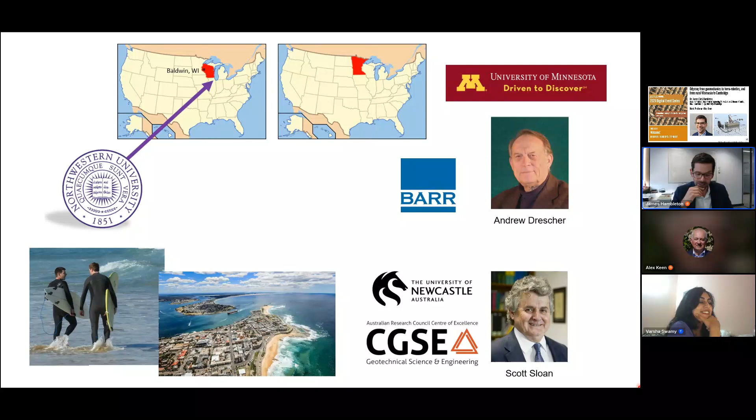As Alex mentioned, the US came calling, figuratively and literally, to come back, and that was a difficult decision, but we are Midwesterners, so Northwestern University seemed like a very natural place to go back to. That's in Northern Illinois, just north of Chicago. And I thought that that was the end of my international travels, but I'm speaking to you now from the University of Cambridge, which is a story of its own that I don't really have time to go into, and I would love to share with anybody who's interested.

Before I get into terramechanics and terra-robotics, I want to give this disclaimer that this isn't the only thing I work on. That's one of the messages I want to give young researchers: follow your passions, look all around, but do have something you focus on. I am very focused on terramechanics, as shown here.

Part of that theoretically is an interesting subset of problems, evolutionary plasticity problems, which you'll see today, so I won't spend too much time on that. I also got interested in constitutive modeling of soils. When I went to Australia, there was an interesting yield surface and plasticity theory question about whether it was convex or non-convex. It turns out that's an applied mathematics problem, which we had a lot of fun with, helping when they were stuck when I arrived.

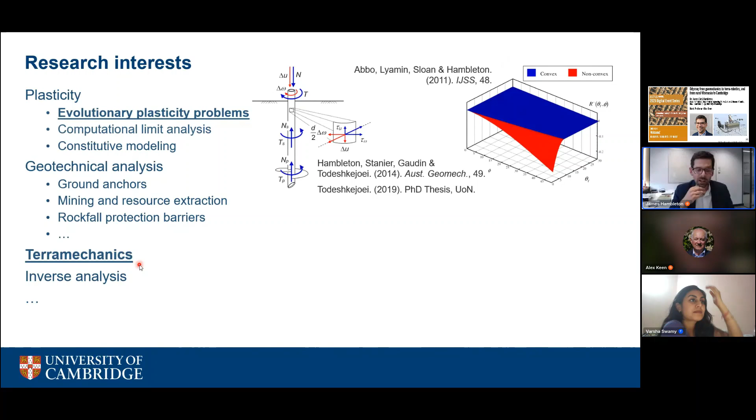I've done work on screw anchors, a very interesting geotechnical problem, actually very close to terramechanics because it involves twisting the ground anchor into the soil. It involves moving parts interacting with soil, which is the definition I'm suggesting for a terramechanics problem. This is a little more exotic - in Australia I met researchers working on this, and what I just skipped over was a real screw anchor being installed. So it's not just theory, but also the practice and applications.

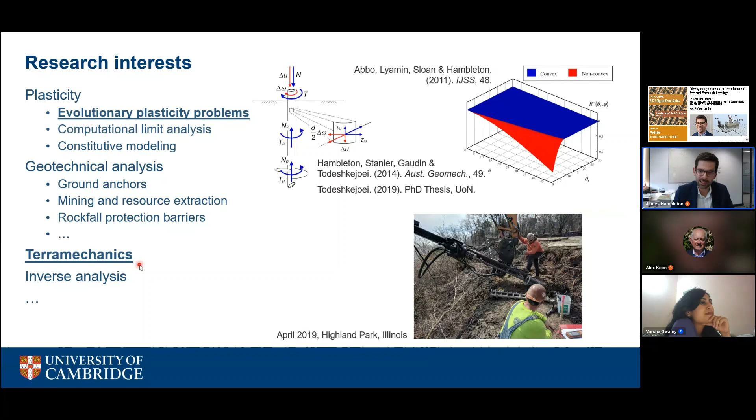I met researchers working on rockfall protection. It's a large deformation plasticity problem - you have failure of this rockfall barrier, and we got immersed in doing this sort of thing.

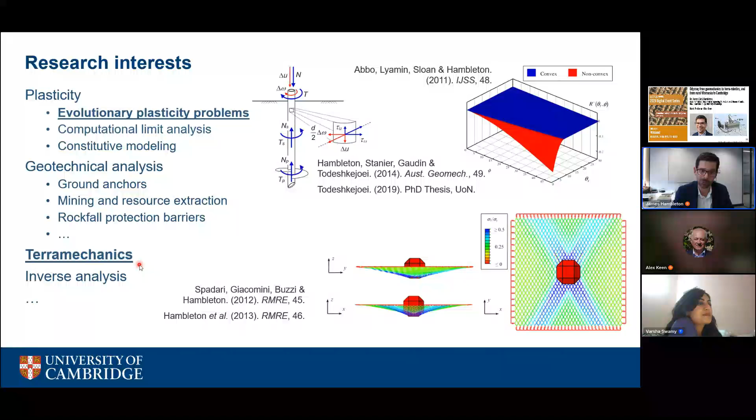So I don't want to suggest with this talk that terramechanics is my only interest, though it's very much front and center as my primary interest. As I said, I want to navigate through how I got here, and I want to appeal to talent wherever we can find it, because there are very interesting problems.

I am unusual nowadays among young people in that I'm naturally drawn to civil engineering. I imagine doing structural engineering at some point in my life, and the appeal is right there for all of us - the pyramids are on this chart moving up to the Burj Khalifa, a fascinating engineering problem. I would also say it's not just the structure, but the earth beneath - the geotechnical problem, which you don't see.

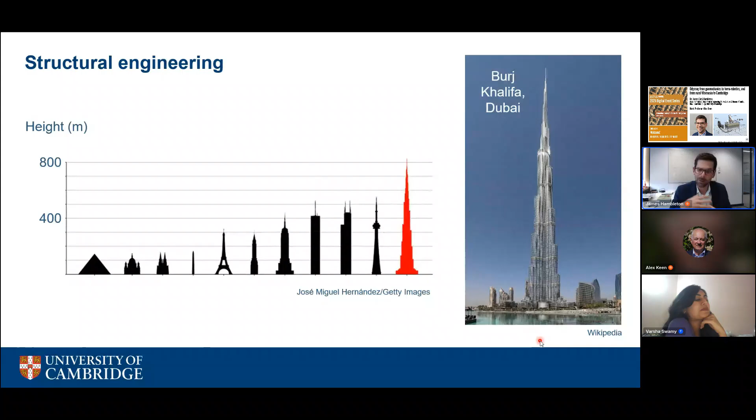And indeed, that was part of meeting Andrew Drescher and getting interested in solids and soils - these things other than slender structural members that really drew me into soil mechanics and geomechanics.

Structural engineering has its obvious applications, and plasticity and failure are right in front of you - if the structure fails, there's no question that it fails. The two examples here are the I-35W Mississippi River Bridge collapse, which we talk about here at Cambridge to our first-year engineering students, and the well-known Hyatt Regency Kansas City collapse. It's a relatively simple engineering issue, and it's almost more of an ethics issue about there not being enough involvement from the engineer in signing off and making sure everything was going to work.

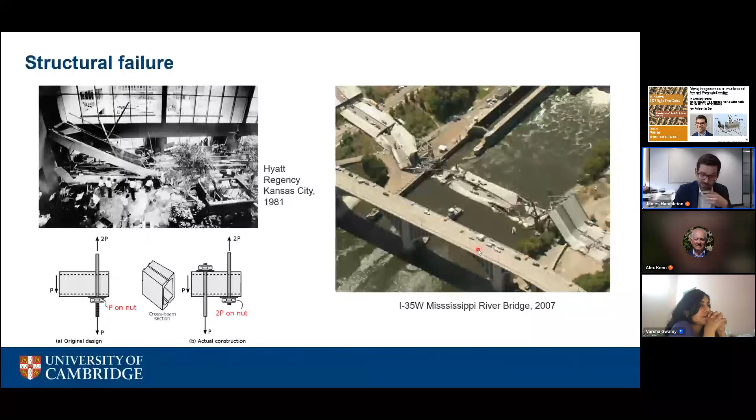So that was more or less what got me thinking about plasticity, initially for structures, and nowadays I've come to appreciate all the plasticity problems around us, including in soil mechanics. The easiest way to see that is to walk across the beach - every time you leave a footprint, that is plasticity. You've left a permanent imprint, a permanent deformation.

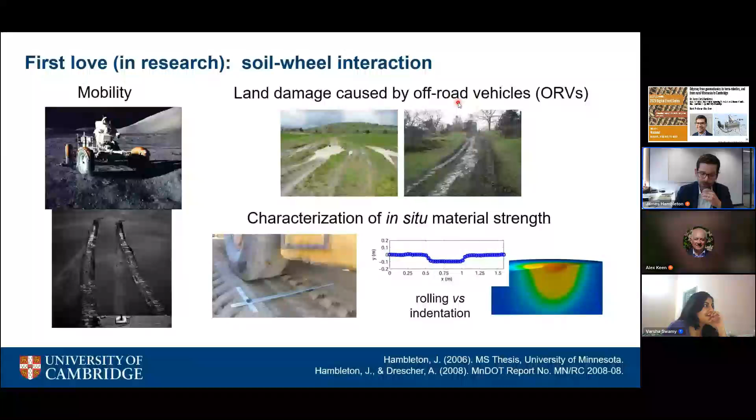That was how I got engrossed in soil-wheel interaction, which as I was going through my master's work, I realized is, of course, not just this problem for the Department of Transportation, but it's mobility. We're here with the International Society for Terrain Vehicle Systems, so these sorts of problems are no surprise. And then other interesting things like land damage. I started to see soil-wheel interaction all over the place.

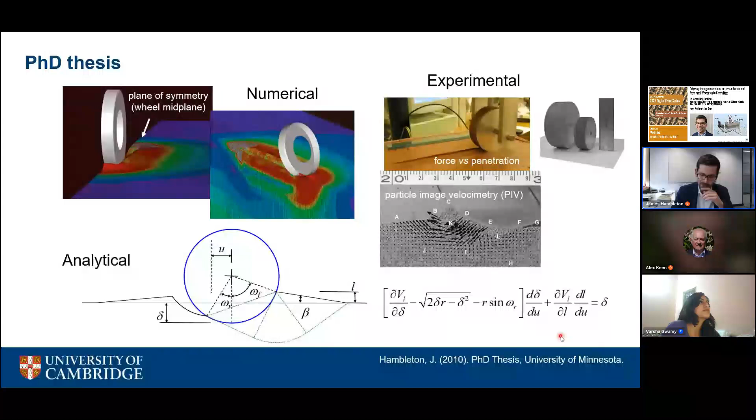After my master's project and wrapping up this project with the Department of Transportation, I completed my PhD thinking about this on multiple levels: doing numerical simulations, which are large deformation finite element simulations in 3D, doing experiments, and then doing what I think is my favorite piece of all, the analytical work—can you build mathematically a solution that gives a very quick answer to some of these problems, a theme you're going to see recurring throughout this.

Just to give you a flavor of what that is, this is far and away the most mathematical set of slides that I have in here, and I don't intend to walk through the mathematics—we don't really need it. You'll see that you can understand the problem without any of the equations or variables I'm showing. Here, let's just take indentation.

So we're talking broadly about any kind of problem where you have an object interacting with soil. It could be a wheel, which is a nice segue from what we just showed, or it could be a cylinder. Here in gray is a wheel-like, cylinder-like object. It's been pushed into some penetration depth, and as it's pushed in, it's displacing some amount of soil next to it.

That is what I mean by evolutionary—there is a process here, it's not a single state, it's a sequence of states, it's an evolutionary problem. As you push it in deeper, we go to the blue curve, and the force is going to get probably larger, although we saw earlier that it may not if it's a softening response of the material. And the lip of material off to the right here has grown.

I'm highlighting two variables in red worth noting for this. Kappa is what we're calling the distance by some measure that the lip of material to the right has moved in one small increment of deformation. And lambda is a parameter that characterizes the distance over which it's being displaced. You can zoom in on this area and do some kinematics, essentially just the geometry relating these variables to each other, thinking about differential movements here.

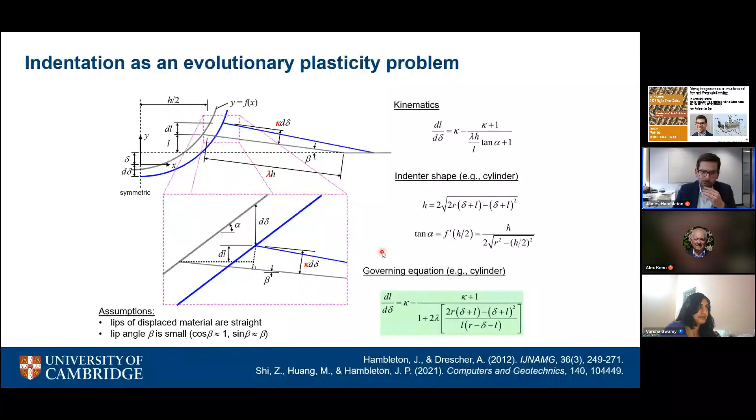As I say, I'm going very quickly through this. You ultimately wind up with a differential equation that tells you how this surface is moving as a function of how you're penetrating in. The really interesting thing about this whole approach is how do you ascertain lambda and kappa, these parameters?

Going back to the problem I showed of the foot on the beach in plasticity theory, it turns out you can actually evaluate that lambda and kappa from the theory we already have for foundations, essentially this bearing capacity problem.

We know how to evaluate, if it's not a wheel but a strip footing sitting on a surface, the average stress Q over the area of the footing, and we can even include lambda and kappa if it's an inclined surface like this in the solution. So the neat trick is you just plug in the lambda, the kappa, the Q that you get from standard plasticity theory when you go deep into the subject.

There's a little bit of mathematical work to do that sometimes yields closed form solutions for certain geometries, and you can get analytical solutions to these problems. You'll see some of these later on. Meaning I have a simple equation that relates what is the force for a given penetration. I can solve that very quickly.

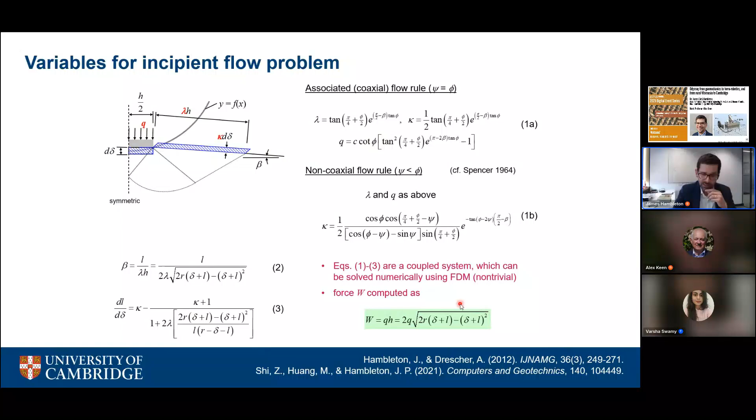Okay, so enough about that, and fewer equations from this point on. The point was not to bombard you with equations, but to show that there's some rich mathematical analysis behind this, and evolutionary plasticity problems are very interesting.

So in comes the autobiographical part, and what Alex had mentioned, what I intend to talk about is at this stage in my life, I'd done my PhD. I was casting about, showing you some of those problems I got interested in, having lots of fun. But I realized if I'm going to keep going as an academic, I need to fuel this interest somehow. There's an expectation, not too long into becoming an academic, that you should probably get some projects set up, apply for a grant, start to pay for some PhD students, master's students to come, pay for some experimental equipment, and so on.

I was thinking about, well, who am I at this point? And I was thinking this evolutionary plasticity problem is very, very interesting. What I'm showing here, just out of interest, is my bedroom in Australia, our bedroom. My wife was very tolerant of dragging in Stockton Beach sand and setting up this bin. If my father happens to be watching, this is the copy of the intellectual devotional that he gave me, which I have read, but turned out to be, if I may, far more useful as a piece of experimental apparatus.

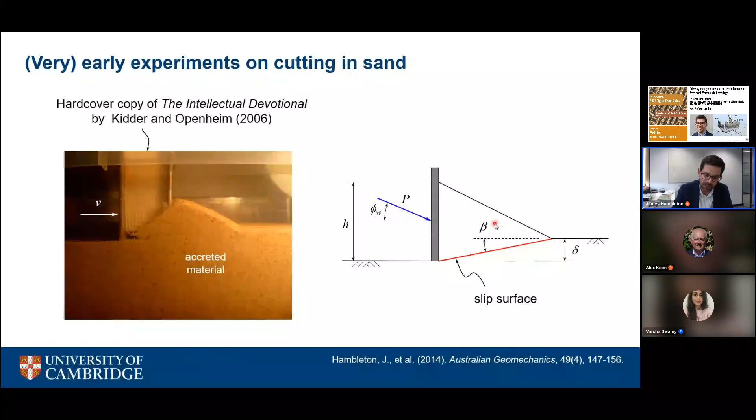There's another way you can do this, which is to just tackle it analytically. I won't go into the details, but here's a little cartoon and a model where you can say I'll build a model predicting the force, assuming that all of the deformation is concentrated along one well-defined slip surface or shear band, shown in red here. What I want to do is show you what happens if you extend that idea. I won't go through the mathematical details, I just want to show you the end result, which is most interesting to look at. There are some assumptions we need to make along the way to getting there.

The key question is whether a material has changing material properties or constant ones. The first result I'll show is without softening. Thinking about sand, it has to be moderately dense, close to the critical state, so that upon shearing it doesn't densify or loosen too much. If that were achievable, you'd expect the same strength throughout the soil as you're shearing it more and more. But of course, those who know a lot about this know the properties immediately begin changing once you start to shear.

But suppose it doesn't soften, weaken, or harden. It doesn't densify, it doesn't loosen as you're shearing it - just constant strength, constant density. What you'll see here is the deformed shape.

Now let's see what happens if we take this to a dense sand. If it's a dense sand, as you start to shear the material, it has to start to weaken - it loses its density, it loosens, and it gets weaker. That's a softening response. So what happens when we have a softening response?

Another interesting feature is that now the local inclination of the slope does get to the angle of repose. With softening introduced, we see this avalanche happening as the process unfolds, which, looking back at the heuristics from the experiments, is very consistent with what you observe for a dense sand. So, interesting problems - this one arguably much more interesting, with a periodic progression of the shear bands.

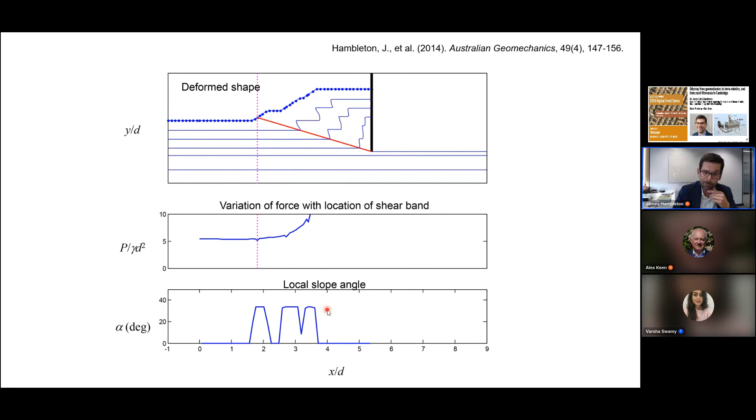They change in locations, they jump around.

So it's not an increasing function. It's a jumpy, periodic sort of behavior that we're seeing here.

So there's some results that are well before the project we've been talking about with Alex, but set me on this pathway to thinking about evolutionary problems in general, not just soils and wheels, but cutting problems. And my mind was starting to open to all of the instances where this happens.

So in come some things that are more familiar to this audience. I'm imagining the ISTVS crowd here, in fact, is Godwin and O'Dogherty, Journal of Terramechanics, which is the journal for the International Society for Terrain Vehicle Systems. There's other problems in geology and at smaller scale.

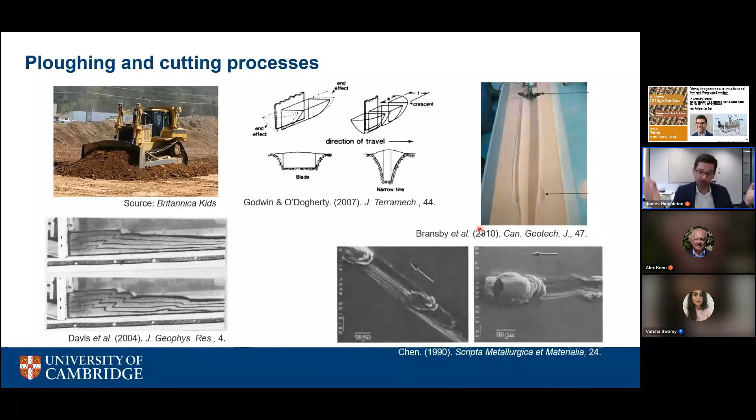And in comes one of the key pieces of advice I have in this. I was thinking I'm interested in these problems, but at this stage in my life, maybe I'm a crackpot researcher. I don't know who I am exactly, but I'm doing these experiments in my bedroom. And then we did the proper experiments. And am I crazy? Is the world going to care about these problems? Is this interesting?

I thought, which is a natural progression for a lot of people, that I need to start chasing some numbers that would motivate that this really is a grand problem. It took me a long time to hit on the right keywords to motivate it from one angle, which was thinking about how much Earth humans move. I thought it must be a lot. You put together all of the different Earth moving processes, and it's got to be a lot of Earth that we move.

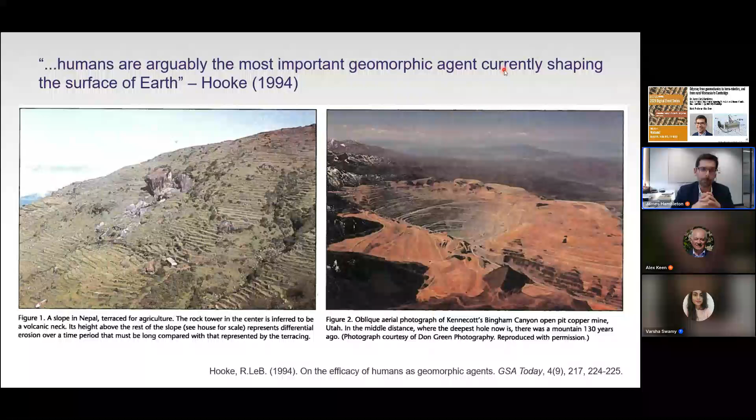And sure enough, if you're patient enough and work very hard, which I did have to do to find this, I found this paper by a geomorphologist who writes very convincingly that we are the most important geomorphic agent. He was interested in natural processes, erosion, transport of materials, and also in how much humans are doing compared to natural geomorphic processes. And the answer is we're doing a lot.

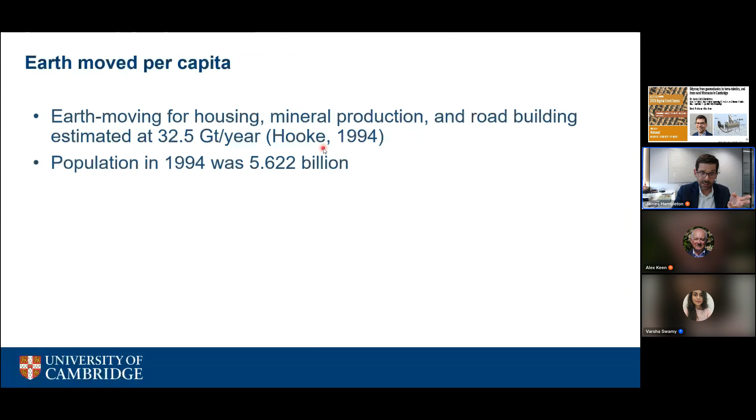It's enormous. I took the information I could find in his paper. He estimated for housing, mineral production, and road building alone, very convincingly, that it's 32.5 gigatons per year. I went and looked for the population in 1994 when this was written and divided through to come up that each of us in 1994, apparently for housing, mineral production, and road building, moved 3 cubic meters of Earth each without lifting a finger, just by virtue of living in your house, buying the products that you buy, using roads, etc.

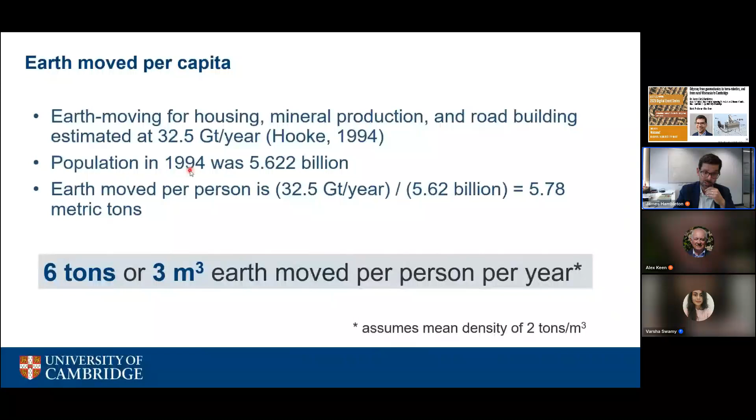And I show this number, which is published information, and I always get a variety of reactions. Some reactions are that this number is probably way too small, and certainly 1994 was a long time ago—we've probably only grown in the amount that we've moved. Very important problem then, at least I convinced myself of that. At the risk of becoming delusional, I suppose, but I thought this is a big problem, very interesting. We have some compelling arguments to make for doing it. I was thinking about offshore problems and plowing and cutting for pipelines, mobility problems across scales.

In Australia, I first started to write proposals and was successful with the DECRA, the equivalent of a National Science Foundation Career Award in Australia, working with Caterpillar at that point as an industry collaborator, thinking about how to model these problems and build efficiencies in designing earth-moving equipment, or the ant-like problem of many machines working together collaboratively to do earth moving across scales.

What happened at this stage, and that's its own story I don't have time to go into, is I was drawn back to the US. My wife was instrumental in that decision again, although this time she was far less convinced, but we had long conversations about what would be the right move for us and our family. I had children at that point. At any rate, the decision was made, for better or worse, to come back to the US, to Northwestern.

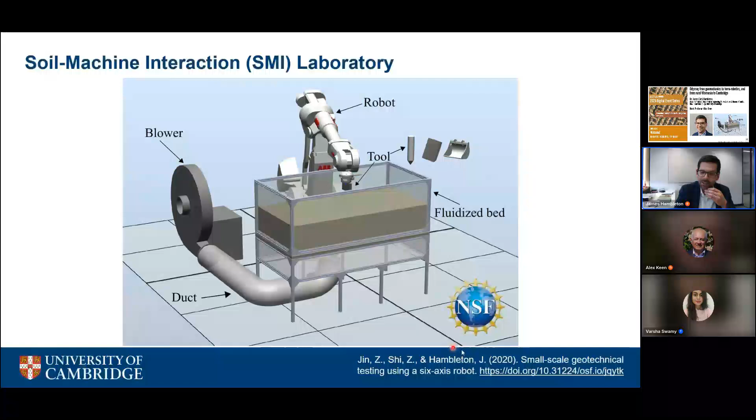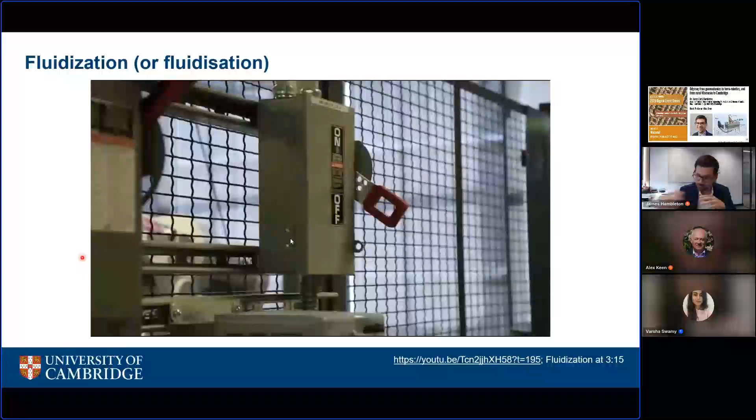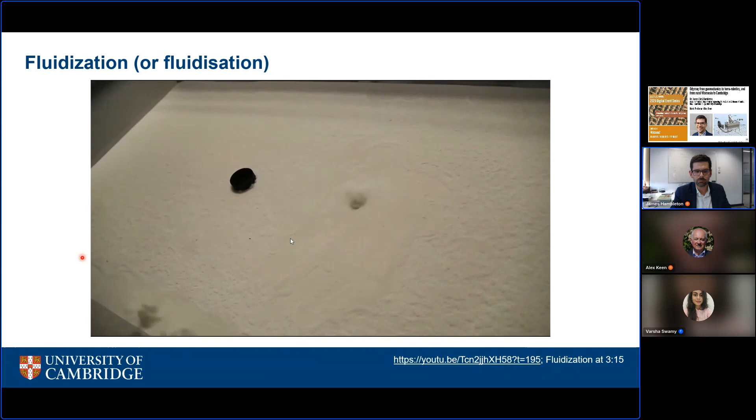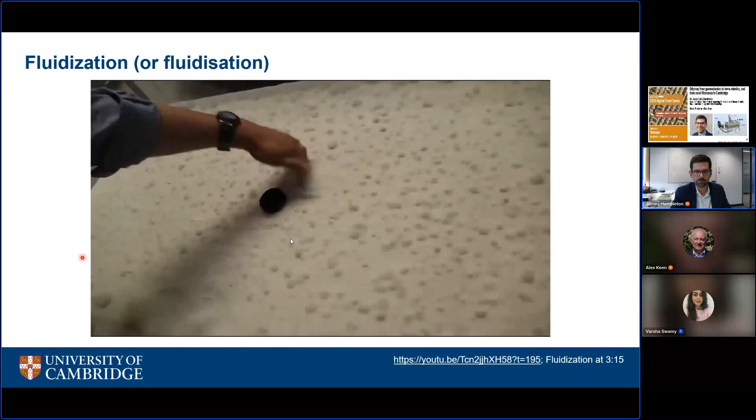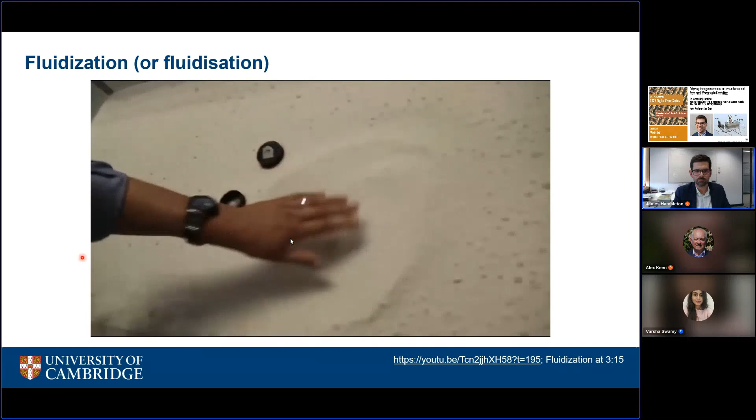Oh my God. And Tierney, you heard Tierney's voice. She worked in the front office at Civil Engineering and is very gifted with videos and music, as you can see. So what makes that video is the music.

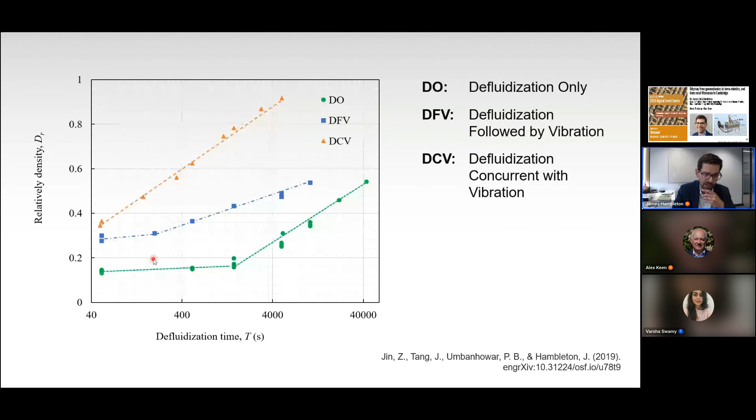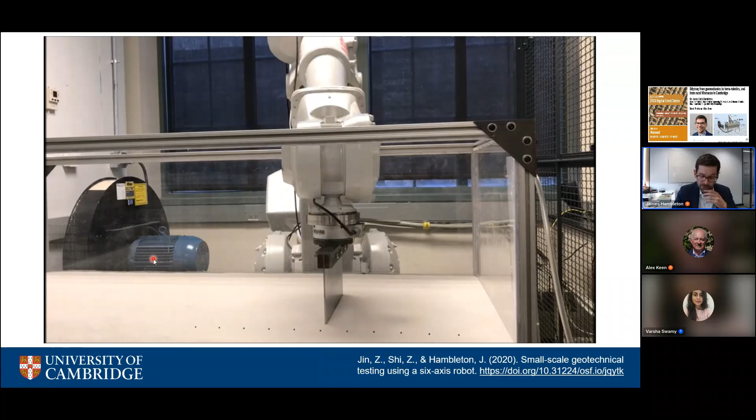So that's the test bed itself, and then the 6-axis robot is essentially, in this case, the way we started in all of this, a very flexible actuator which can do all kinds of motions, not just cutting, which is what you're seeing now, but it could do whatever you want. It's about to twist, and you could imagine even screwing something in, more complex problems, and a wide range of possible kinematics and trajectories you would follow.

So this was the moment. We built the bed, we'd got some interesting results on this, we were moving along, and it felt like the right time to really declare, and that's what you do for one of these career projects. It's an unusual grant proposal in a way, because you're kind of making it about yourself.

Lots of grant proposals, you have a compelling problem, you argue for it to be done, but you have a team of people and resources are going to be distributed. The spirit of the Career Award, and this DECRA in Australia, is that it's something to help early career researchers, and you really want to think about who you are and what you want to do, or what sorts of problems you want to work on. It's meant to launch you into your research career.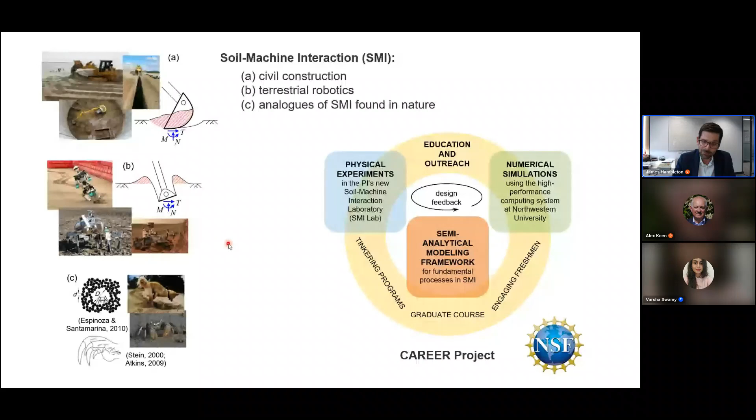Some of that came to fruition, but a lot of it was actually derailed by the COVID pandemic. So I don't have much more time-wise that I can say about education and outreach, and I don't need to, because you're welcome to go, if you're interested in this, to Figshare, or this is also on YouTube. I recorded a talk on inspiring interest in geotechnics, or terramechanics, and that's the point of today. I was imagining advocating for geotechnics. Today I'm advocating for terramechanics.

This is the same problem we have in terramechanics, in that there isn't a clear entryway into terramechanics from the very beginning, unless you happen to have done a lot in your own backyard in a community. Alex and I actually had a lot of conversation about this just yesterday, that both of us come from rural areas and would have been very familiar with terramechanics problems at an early age.

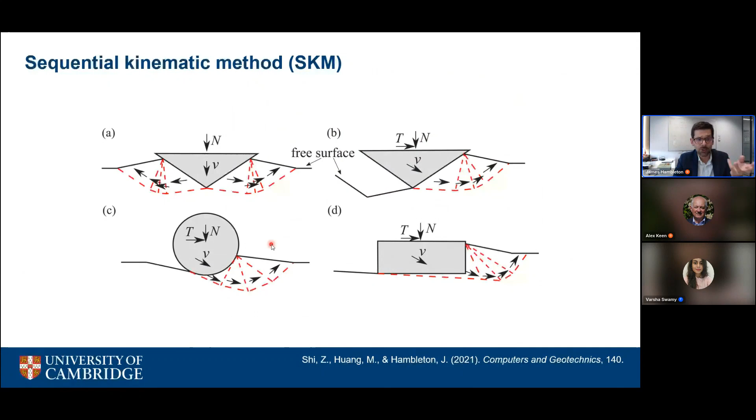In general, you could have whatever object that's undergoing, moving through the soil and inducing large permanent deformations. One of the things that Jin Hao and I worked very hard on as part of this project was to generalize this technique that I showed earlier. We're calling it now the sequential kinematic method, which can very efficiently solve these sorts of problems.

You saw some examples. There's more examples in the paper, and this one is, I think, particularly impressive. It's a cylinder where you push it way into the soil, deep penetration of a cylinder. In offshore geotechnics, this would be a T-bar problem. That's a challenging problem to simulate, and you can solve it relatively quickly by subdividing the domain into triangular blocks and doing essentially a glorified version of what I showed earlier, where you're tracking how they move, optimizing in each load increment, calculating the deformed shape, and then incrementing the solution.

If you plot normalized force versus depth and compare, there's an analytical solution out at this point. There is no analytical solution all the way through—there's the shallow penetration problem that I showed earlier. The only complete solution would be to run the red line, a finite element calculation, and the blue dots are pleasingly close to the red line, which suggests that you can calculate this solution quite efficiently, much more efficiently than using a finite element solver with all of the bells and whistles.

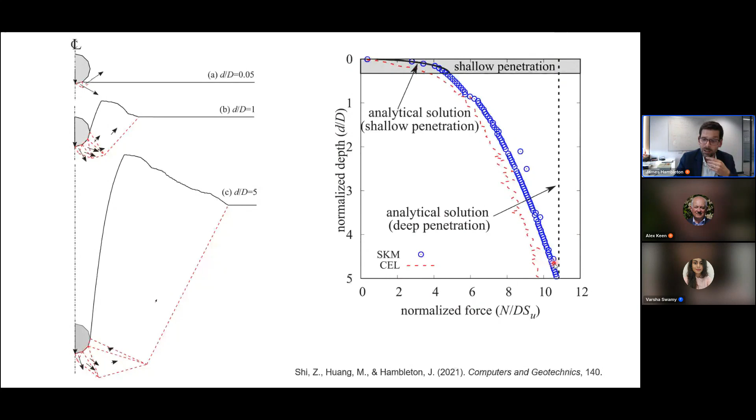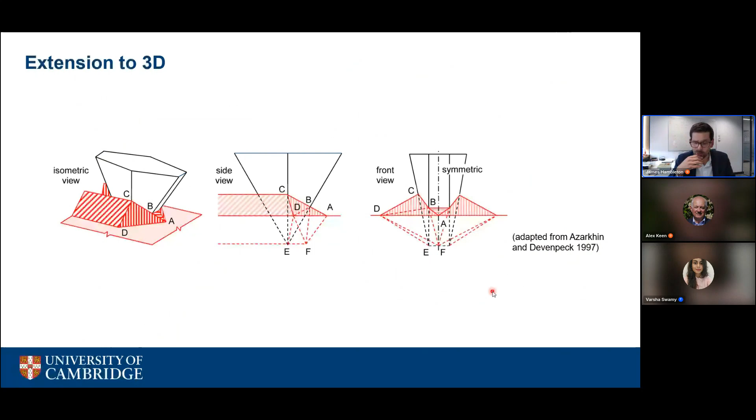Part of this was to think not just about 2D problems like I've been showing the whole time, but 3-dimensional problems. You saw in some of those images deformation to the sides of the object. Some very elegant solutions on steady flow problems by Azarkhin and Devenpeck inspired some of the thinking about this. One thing you can do is extend this paradigm from triangles to tetrahedra. You saw triangles moving within the soil domain in that cutting problem; for the 3-dimensional problem, the equivalent would be these tetrahedra. Sure enough, it requires some fortitude with the mathematics, but you can implement everything that worked in 2D in 3D, building very efficient formulations for 3D problems that way.

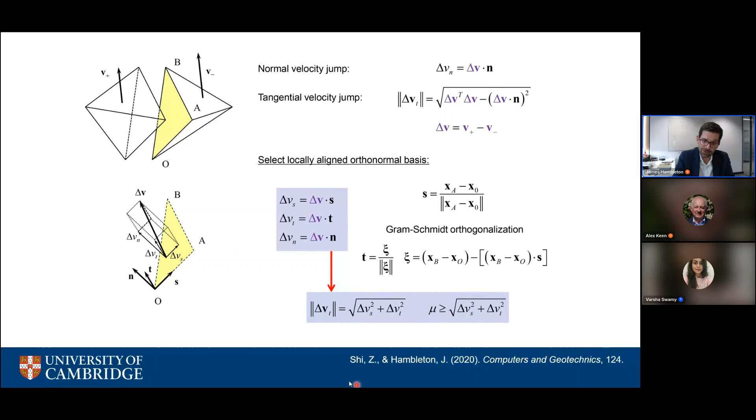Again, Jin Hao is the champion of this work who made some things happen in 3D.

One thing I'm really excited about, which we've been working on more and more behind the scenes, is whether you can have a semi-analytical model for an object moving through soil at some trajectory. It's got generalized forces, H, V, two forces, and a couple and a moment, and those evolve as you're pushing this thing through the soil.

You could imagine modeling that, and this has strong grounding in work done on plate anchors and keying problems in offshore geotechnics. There are some great papers on this that leap to mind that I can send to people. Mark Cassidy, at University of Melbourne, has done a lot of work in this area.

Essentially what you can do with these problems, for those familiar with plasticity theory, is have a generalized yield surface that operates with respect to generalized forces and moments, including the couple. You could imagine for this problem a generalized surface that evolves and changes as the geometry of the problem changes, and perhaps the strength of the material changes as well.

And then you could calculate, using plasticity theory, flow theory of plasticity, the evolution of the forces as you follow one trajectory or another through the soil, which is being illustrated here.

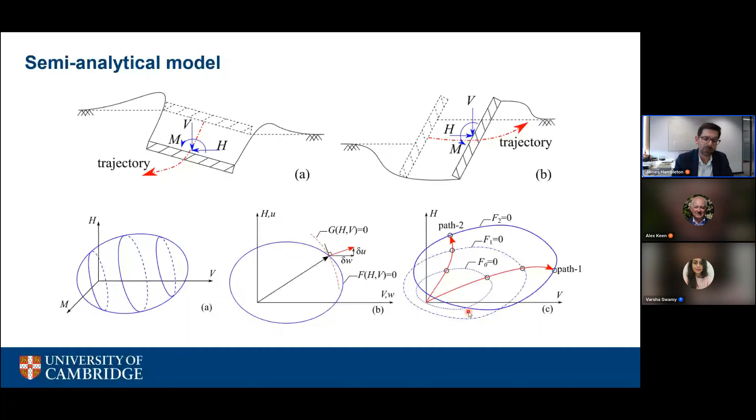The first person to really start working on that is Jaffe, who I mentioned and showed. She was in sand, pushing in a plate. So this is, again, the plate problem. You saw the plate in the video. You push it in, but you change the way that you push it in.

So push it in at a steep inclination from the horizontal, or a shallow inclination from the vertical. Then you start to change that inclination angle, moving more from a penetration kind of process to a translation kind of process.

And lo and behold, we can measure with the 6-axis load cell on the end of the robot the forces. We're plotting H and V as a function of displacement, and the blue curves are her numerical predictions based on this semi-analytical model, so far as she was able to develop it for sand.

If you want to know more about that, the only place it exists, like so many other things, is in Jaffe's PhD thesis. She graduated after the pandemic, a difficult time for all of us in 2021, and then went to work for Meta, where she still is in California. Big loss for the geomechanics community, but amazing that those skills are so portable.

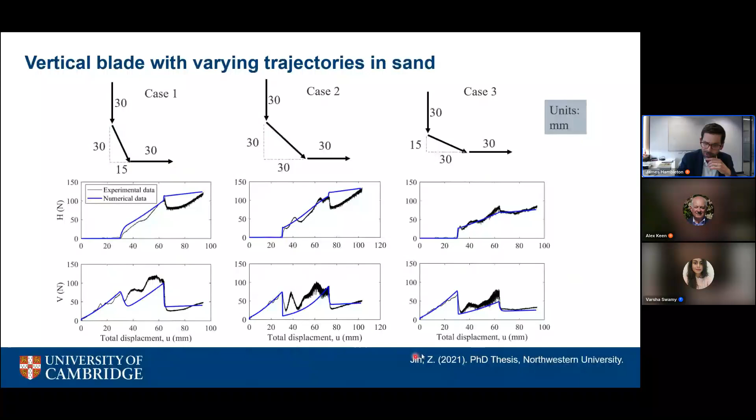And I hope if Jaffe ever comes to see this, it will be inspiring her to come back to think about terramechanics problems.

She is needed. Okay, the last little piece. I'm very nearly done with my tale, and I hope this is the right balance of technical material and the story of the NSF project.

This is an interesting dimension of the NSF project because Qing Hao, who's now working for ANSYS, was interested in coding and machine learning methods, and came. I'm very grateful he came to work with me on this project. He was part of the National Science Foundation Career Project that we've been talking about here.

And the story here, what I'm going to advocate for, is that you have to be yourself. I had to be myself when I was imagining what this project would look like. Whenever a new student comes along, I work very hard to allow them to be themselves. Qing Hao was really, really interested in using some of the new machine learning things coming online, data-driven methods. And I said, why not? Let's give it a shot. I can imagine how this could work.

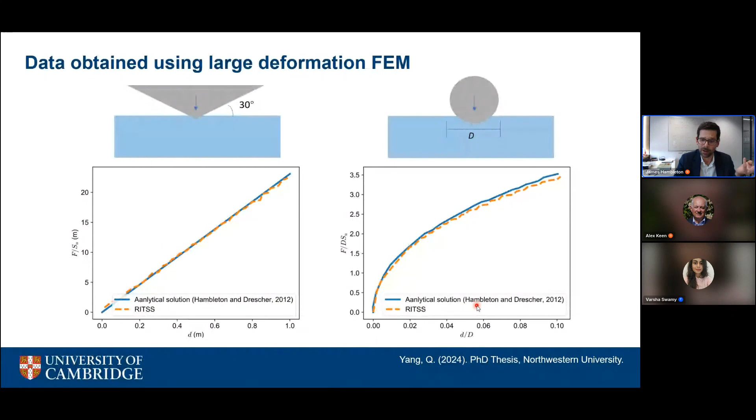Qing Hao and I said, well, what if—you notice nowadays there is a lot of effort running these kinds of calculations for essentially the same kinds of problems over and over again. People are generating, either deliberately or out of necessity, data from their projects. They're not necessarily storing this data, but there's a wealth of data that comes out of all these simulations. We were wondering, could you build a surrogate model or data-driven model that really didn't think about physics, didn't rely on physics, but was just predicated on the data you can get from these simulations?

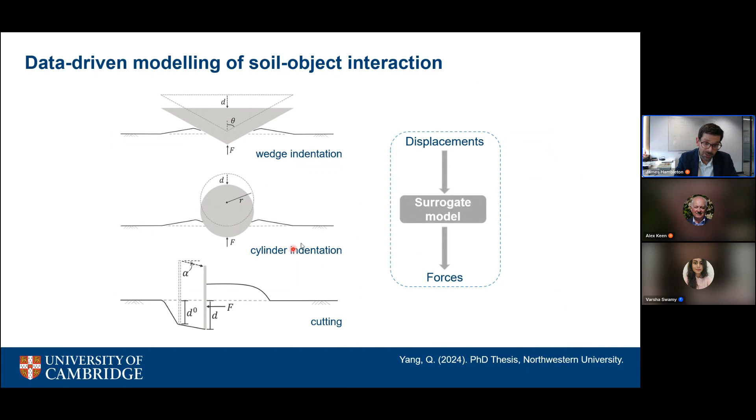I'll show you a bit about wedge indentation, cylinder indentation, and the cutting problem will resurface here. There's some machine learning in here, which isn't necessarily the interesting part because you see machine learning everywhere. What we were working very hard on is trying to think about how you build the architecture that enables machine learning in a useful way and doesn't make it a complete black box.

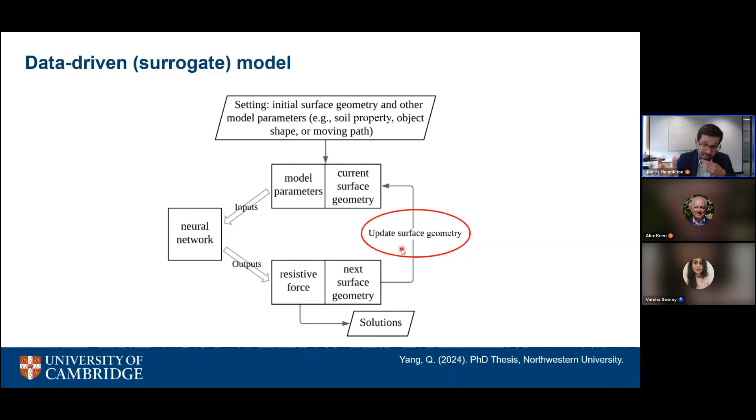The interesting part of these problems is this evolving geometry. So what we focused very heavily on was how do you represent the surface as it's evolving and changing? You could make an ad hoc assumption about what it looks like—you could say it's piecewise linear, for example, some curved shape as a collection of straight lines.

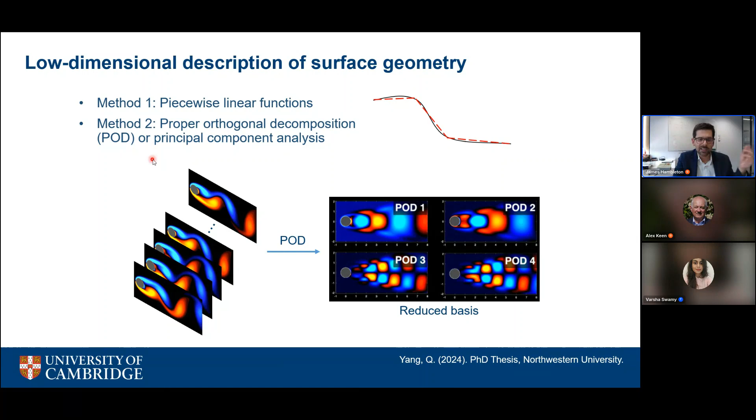Or, this was again the breakthrough—although that's a strong word—this was the step that I think is really interesting in this work: to say, why don't we use proper orthogonal decomposition? This was Qing Hao's idea, I don't think this was my idea. Why don't we use data analysis techniques to calculate what the surface is as it evolves? This is well known across multiple fields, as you saw there.

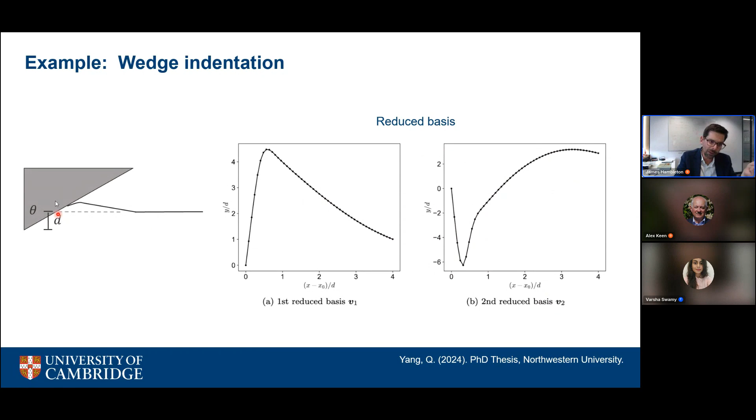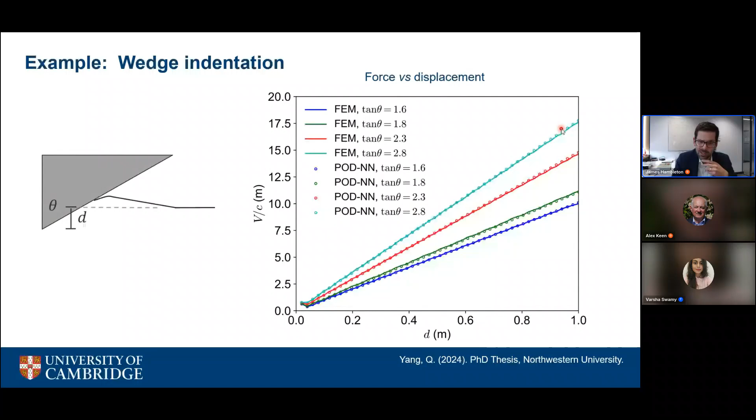It starts to get a little more interesting. I was encouraging Qing Hao: push this until you break it.

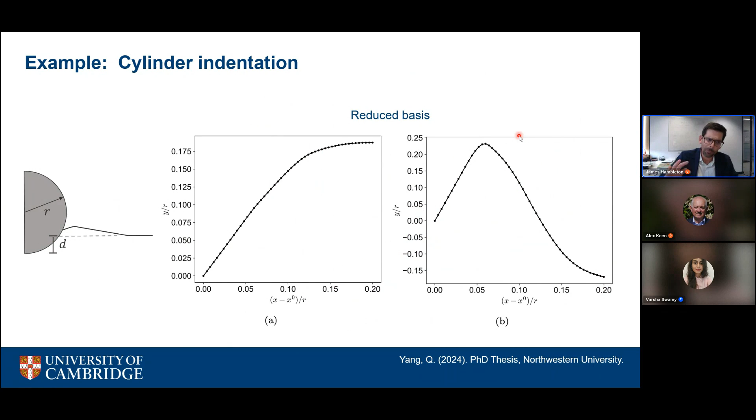So here's the cylinder problem. Again, here's the first order approximation of what that looks like. And this one, you do have to flip in your mind. It's upside down. That's a pretty good approximation, but now you actually do have to add in the second order approximation to get a reasonable approximation of the free surface in total.

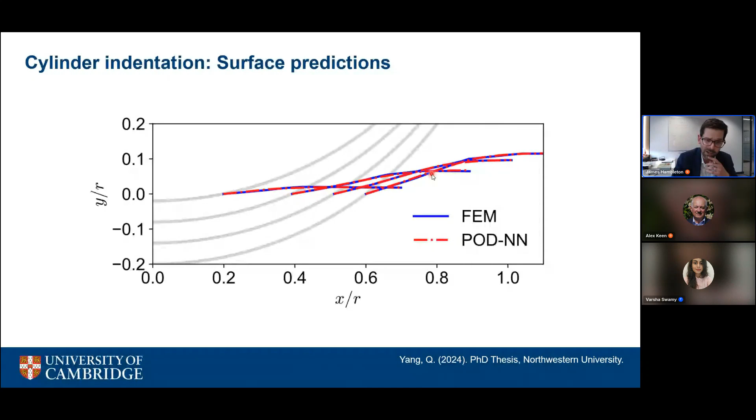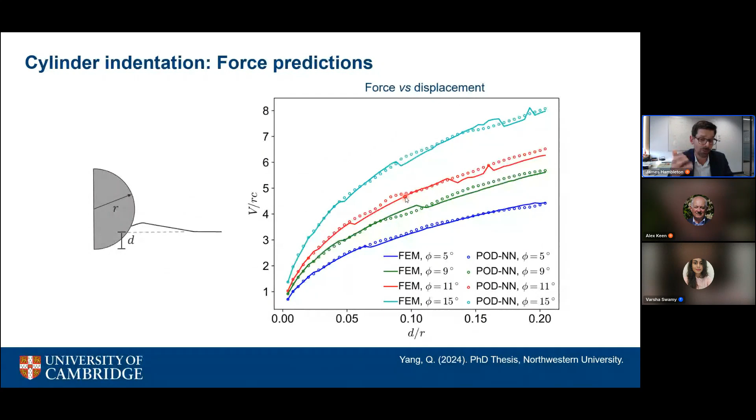The last one I'll show very quickly is the cutting problem. This is no longer sand, this is essentially clay, modeled using the von Mises material model, perfect plasticity, fixed yield surface von Mises, or Tresca if you like. This is the cutting problem. It's a plate moving from left to right, and there's this region of accreted material, which looks different now because it's clay, a sticky material essentially.

You can see here the first order approximation from POD. You have to flip it upside down in your mind, but that's a good approximation. This is just a cartoon, but a reasonable approximation to what the lip looks like. Then if you want to do better, you add on this extra part, scale and add this, and that's refining. You can see what the deformation looks like at the point of intersection with the free surface, which is a fascinating dimension of this that's vitally important. You saw that these problems work as a concentrated zone of deformation which intersects with the surface, and this really has a huge influence in determining where that band is and how the force is going to change.

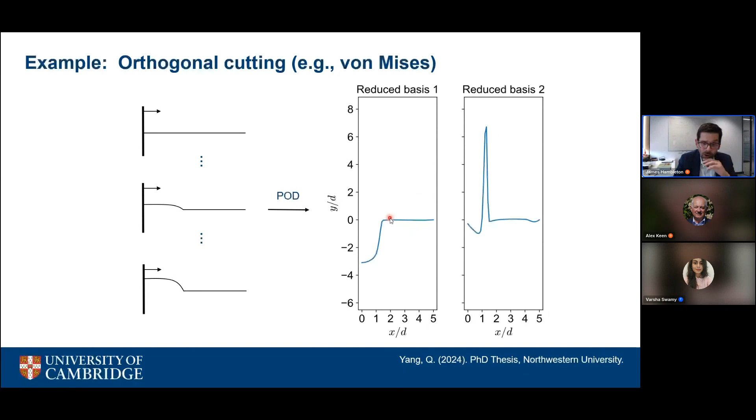I hope that makes sense. Forgive me if it doesn't, I'm throwing lots of information at you. This is the end of the orthogonal cutting, and these are very busy, but still I hope I can navigate you through them. Over here is the evolution of the surface.

This is just plotting the evolution of the surface ahead of the cutting problem. It's a plate being pushed. You have more and more material getting pushed up. So here's early in the process, and then as you push further and scale, because it's normalized, you've pushed up more material.

What's interesting is we can go back and ask, what if we had done a piecewise approximation? We just had a guess for what the free surface looks like, we hadn't done all of that POD business I was just talking about. Well, it turns out I can't really get a very good approximation of the free surface if I try that. I need a better approximation of the free surface for it to work. If I look at the forces versus the displacements from each of these approaches, the one based on the piecewise linear approximation of the free surface, this green line over here, doesn't do very well at all. In fact, it has the wrong concavity in this plot. It's increasing at an increasing rate versus increasing at a decreasing rate, which is what it should be.

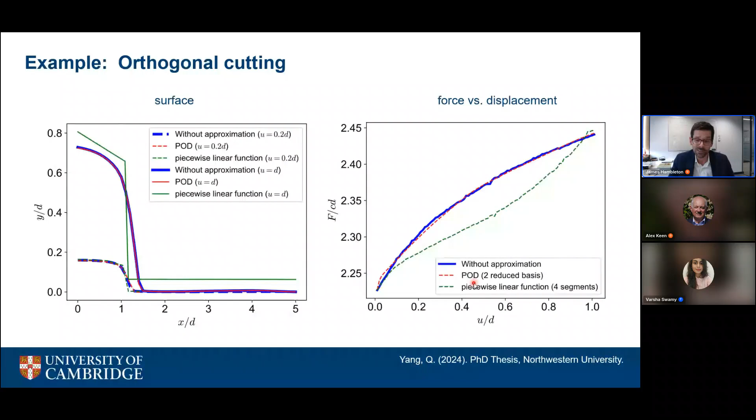So what is interesting about this is these evolutionary plasticity problems are really tricky, and you need to know where the surface is at any given moment. The point of all of this is to say that this proper orthogonal decomposition approach, if you have data, which could in principle be from experiments or simulations, you can do very, very well with that. Okay, so I'm done.

I think that's kind of key outcomes from the National Science Foundation project, a whistle-stop tour and incomplete at that. I'll end by talking about what's happening now here at Cambridge, and with some concluding remarks about what we can make out of the story that is unfolding today.

We have two large 6-axis robots. They were here before I got here, and one of them turned out that its job was done with what it was envisioned for, and it was just sitting there as a piece of equipment that anybody could use. So no purchase of a 6-axis robot required.

We learned our lessons with the fluidized bed, that even though it's a nice piece of kit, people are afraid to touch it and afraid to break it. It's an expensive piece of kit. So in this case, we've gone to using an expendable box. We can drive the robot into the box and it doesn't matter. There's no fluidization now, so we have to be very, very careful if we're going to start thinking in detail about what the sand is and how we expect it to behave.

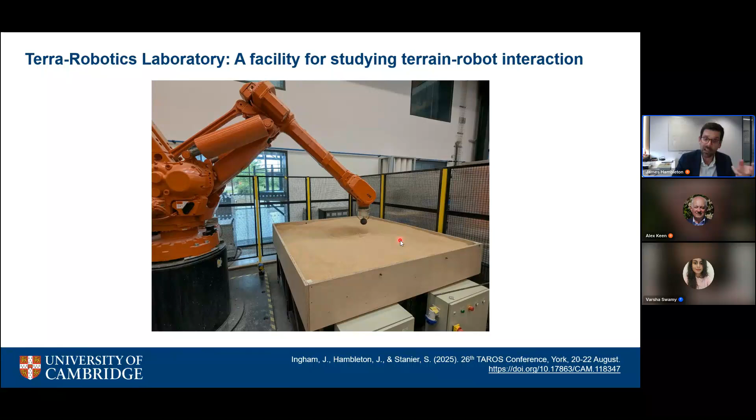But Joe Ingham, who I believe is listening, took on this challenge. The fascinating thing with Joe is that he's not a civil engineer; he's an electronics engineer, electrical engineer, and he's interested in robotics. So he's really interested in this end of the problem. We're drawing him more deeply into the geomechanics end of the problem and saying there's a lot of work to be done here. So I'm going to show some of his preliminary results.

He got this setup up and running and has the robot able to do trajectories however we want. We'll start with a very, very simple case, which is straight line motion. It's just moving the end effector straight through the soil. We have a sphere in this case because it's agnostic with respect to direction to the extent that any object could be. He's just pushing it in and then dragging it across the soil.

You can see some parallels with what I already showed. This is now the evolution of the lateral forces. In green, Fy is the force in the direction of travel, and Fx is the lateral force that's perpendicular to that. So you don't expect that to be a major player, but the Fy changes quite a bit as you push it into the soil. Then as you start to move from left to right, you have the evolution that's happening, and then something that's resembling the steady state. But it never actually reaches steady state in this case because the free surface wasn't level to begin with.

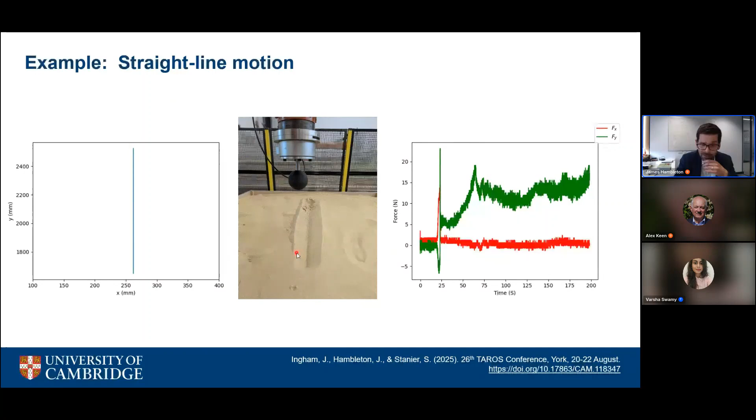You can see the price we're paying for not having a fluidized bed is you have to level out the surface every time. We have no idea where the surface is in general when we start this problem. You can go in and do your best to level out, but this natural variation primarily comes from the variation of the free surface, which you would have in any of these sorts of problems. This is really the demonstrator to say whatever elaborate type of motion you would have from your robot, you can program that in. Joe has made that work.

This is a spiral that it's doing now. What's interesting is the same Fx and Fy, as I described, the lateral forces perpendicular to each other. As you're undergoing the spiral and moving outward - I believe, Joe will correct me if I'm wrong - then you actually never reach a steady state because you're changing the terrain profile as you go. So automatically, these are really, really interesting problems, and interesting problems requiring some predictive methods for everything.

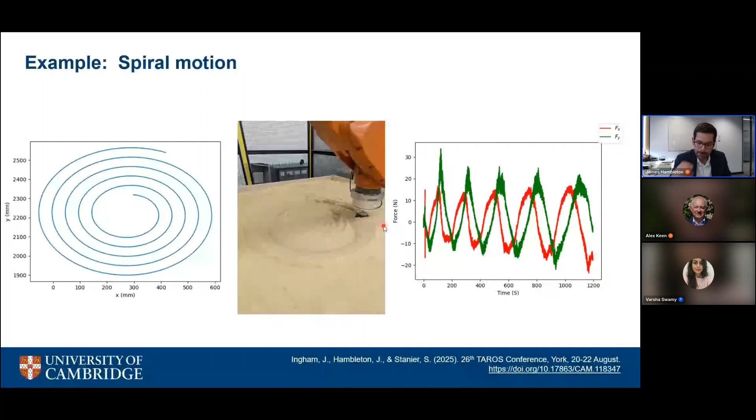I'll seize this moment, I'm winding up now, to say a few more general statements. One is, in the course of doing all of this, I spent a bit of time thinking about what is the definition of terramechanics, usually without the hyphen. In my graduate class, where we started talking about these problems in seriousness and looked at the range of possible problems, we came up with this definition: they're problems that involve interaction between moving parts and terrain. And they're out there in abundance.

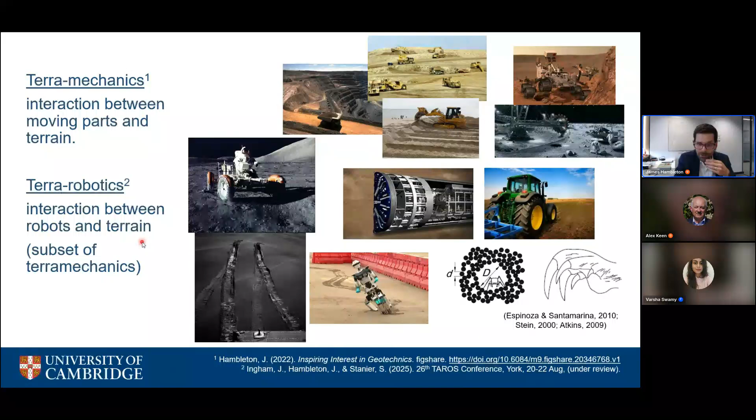This list of problems has just grown since I started cataloging, in my own mind and elsewhere, all of the problems that are here. You can read about this in some papers, and watch the video I mentioned. One thing that Joe and I bravely did was decide that the latest incarnation of the problem he's interested in is really the robotics problem—robots interacting with soil to do earth manipulation, mobility, agricultural problems, you name it. We decided to start calling that subset terra-robotics problems. I don't know that we need another term, but we're saying this means interaction between robots specifically and terrain. You can read more about this elsewhere, and that's where I'm ending with my general sentiments.

Now this whole field, from structural engineering to geomechanics to soil-machine interaction, back to terramechanics—a term that's been around a long time—is sort of settling with terramechanics as the mother of all of these. In the Venn diagram, it's the largest circle. And terra-robotics is the specific problem of all the reasons why we would want to program things to do these different tasks.

The applications, I hope, are relatively clear at this point, and there's a lot of problems that need to be solved. I've been emphasizing that we really need models to predict what's going to happen, and those are extraordinarily lacking. We can run so-called high-fidelity simulations, but at the very least they take a really long time. We're getting much better at that, but they still take a long time. They're very computationally onerous—if nothing else, they require a lot of energy rather than equations, which give us results very quickly.

As I showed, we encountered the problem that at this stage we need to map the terrain in real time. If you're ever going to get to automated earthworking, you need some way of seeing where the surface is. We're working on that at the moment, open to suggestions. We have our own approaches and ideas, but mapping is an interesting problem.

The control problem—if you have a task where you want to change the earth in a particular way, or a mobility problem where you're optimizing your own thing—working out how the control works is something this audience is very well accustomed to as an interesting challenge. End effectors change dramatically depending on what you're interested in. You saw things that were essentially bulldozers here, but it doesn't have to be that; in mobility you often have more penetration-type processes. So there's a wide range of possible outcomes you want, and topology optimization—changing the shape of the end effector—is going to be really important.

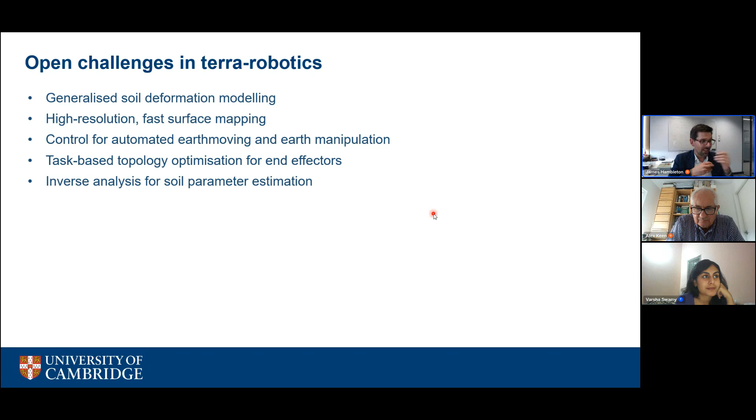You need to find those opportunities. You have to put yourself out there, do a lot of work sometimes to figure out where people are and go to conferences. Alex and I were talking about this the other day — the importance of opening yourself to all available possibilities. Everybody here needs to go to the next ISTVS conference. That's the whole point of going to conferences: meet people, make unexpected connections. So the US is an interesting one because it's changing so quickly.

Australia, when I went there, was extraordinarily favorable to infrastructure. That project I mentioned at the very opening, with Professor Scott Sloan, he was successful in building up this center, and there was a willingness to look at infrastructure — offshore problems and onshore problems, including railways — and a real willingness to invest. I would imagine that has moved around since the time I was there, and I don't know exactly what it looks like now.

One of the disadvantages of Australia is that the academic scene — and maybe that's a little closer to England, I'm not entirely sure — is that faculty positions get to be a little grayer, with a move towards more soft money positions that you pay for out of research grants. I think universities are threatened by that in a way, and there are lots of pressures that have led to it.

But in Australia I felt, for the first time, that there's a high quality of life and people are generally happy. Academics at universities are under a lot of pressure, and it's a kind of strange pressure where you feel you need to go earn some money. So I think the practical, useful dimension of what I've said is that I understood it was going to be very good to start thinking about funding, because that enabled lots of things.